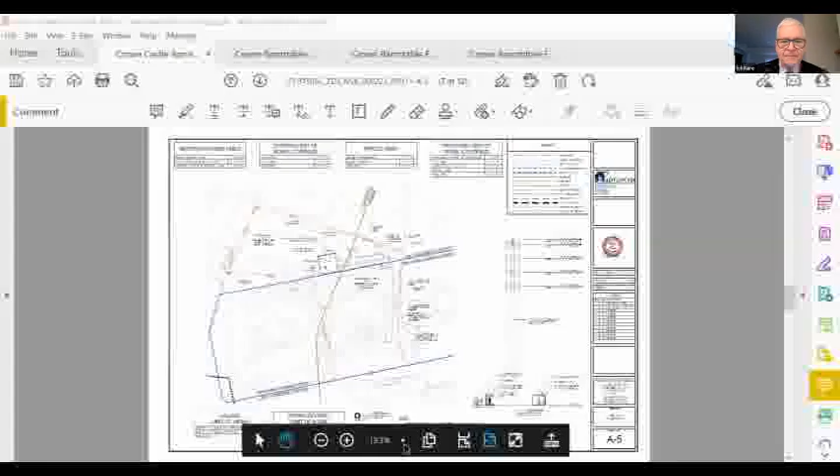So I'll just jump right back. We had appeared here for informal site plan over the last 11 months. We have gone through the process with the Cape Cod Commission, we have received their approval via their written decision, which has since been recorded.

I will quickly go over some of the changes that were made, just to refresh everyone's recollection about the project. So what we're looking to do in this property is sort of cut up in different areas, zoning districts and fire districts. Falmouth Road, obviously here with the commercial development of the site, we'll be using the commercial portion of the property to access the tower area. The actual site is outlined here in red.

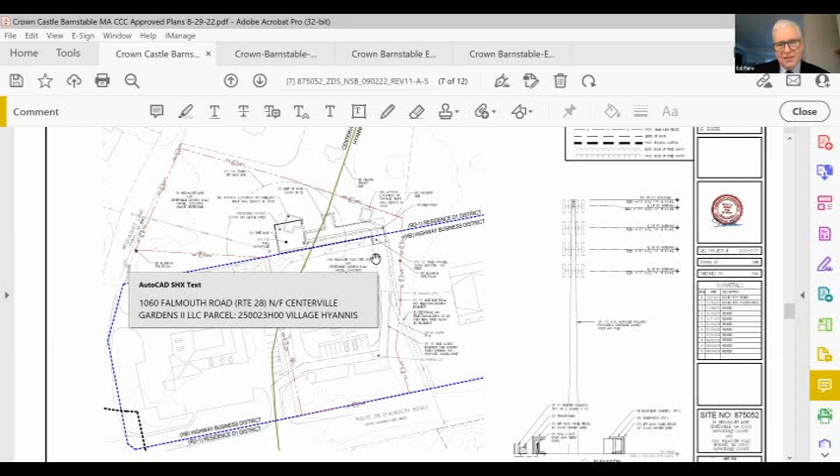As I said, the property is located in 2 zoning districts, the HB Highway Business District towards the front, towards Falmouth, and the RD Residence D1 district toward the rear, where we propose to extend a gravel access drive along the way to the tower.

The black dot here is the proposed location of the tower. None of that has changed. The location of the tower will remain the same in consultation with the Cape Cod Commission. Likewise, the height of the tower will remain the same. We did provide some additional screening and vegetation with a landscape plan, which I'll run through shortly.

One issue that came up at the informal site plan review was what address to use for this particular property. As you'll see from this green line, which runs north and south, the property is located in 2 fire districts, Hyannis to the right, Centerville to the left. So at informal site plan, there was some question about what address would be used.

We did reach out. I understand that Matt Sumner, who I've worked with on other projects in the wireless sphere, has left engineering, so I think this is an issue that we do have to address. I've had some communication early in the week with Mike, and I see that he from engineering is on the call. So I think that's the only issue that remains.

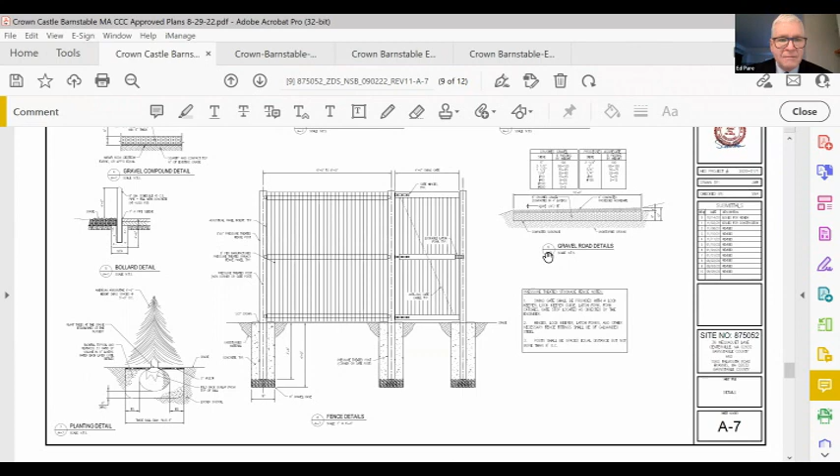I will flip down and hopefully don't make anybody nauseous here.

So a couple of highlights of changes that were made. I think we had always proposed a sound barrier. This is a part of the fence design for the compound. So because the residential properties are located to the north of the site, we have proposed a sound barrier for sound attenuation for the electronic equipment that's in the compound and the backup power generators, which I'll discuss momentarily. Cape Cod Commission did ask us to provide a detailed landscape plan, which you'll see here.

We'd initially proposed just a string or a line of arborvitae. We've gone into much greater detail in outlining what the landscaping plan would look like. We also cut down the size of the parking and turnaround at the request of the Cape Cod Commission.

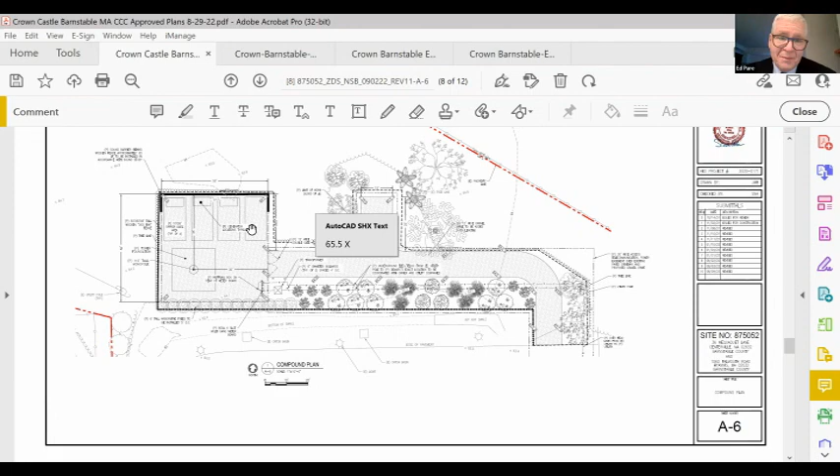Otherwise, the project remains basically the same as Maggie read. It's a 110-foot, 4-carrier pole. We received the approval of the Cape Cod Commission, and I think we have addressed all of the comments from the informal site plan with the exception of working out the address, which is more of a town issue.

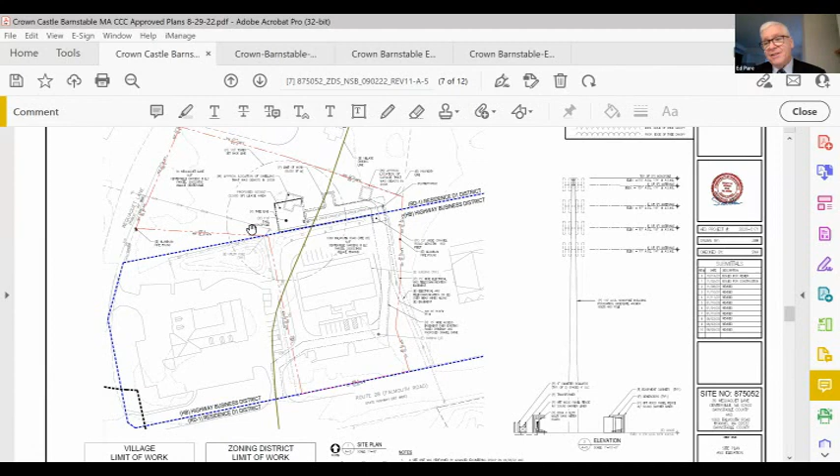We are not proposing to have access over Wequaquet Lane. There's really no way to get to the tower. There was a temporary access drive placed there to do the commercial activity, but that has since become overgrown. So I think from an access standpoint, the address is clearly along Falmouth Road.

And if it's a 911 call or something where there's an emergency, that's something above my pay grade, I think, but that seems like the logical address, depending on what the public safety people and engineering have to say.

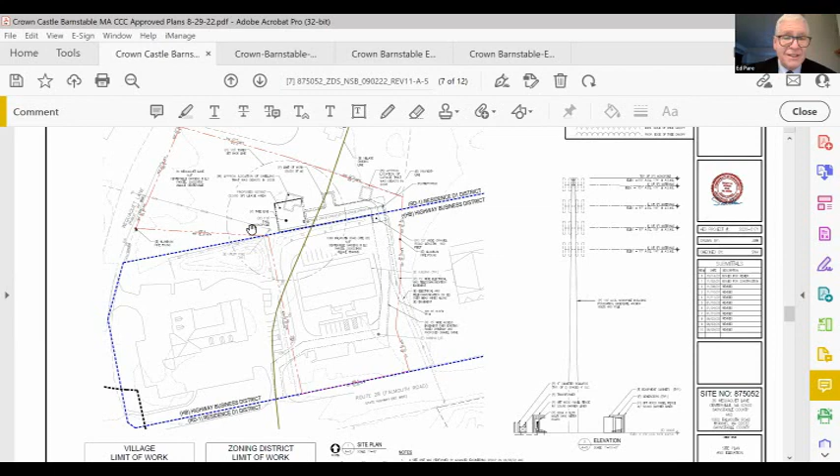With that, like I said, we have Scott Adams, our engineer, on the call, and Paul Beckins from Crown Castle, if there's specific questions. That's sort of the gist of the project. We are scheduled for February 8th before the zoning board.

Excellent. Thank you. If you don't mind dropping your screen real quick. Oh, sorry.

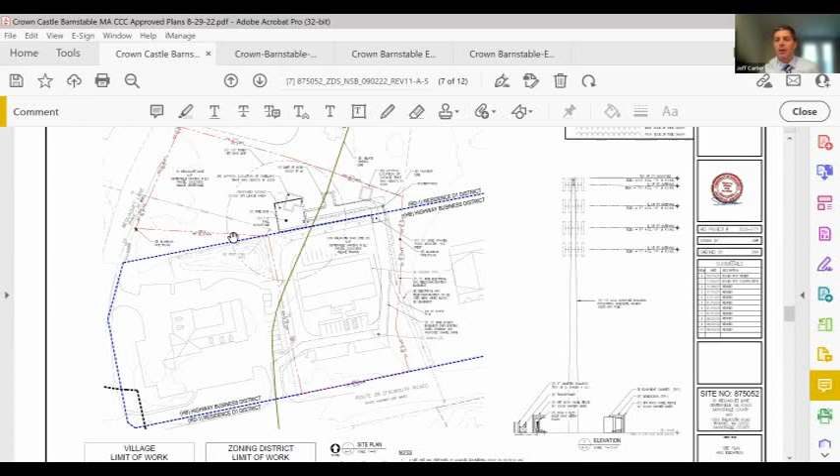Good morning. I almost said afternoon. My comments, Kate Maldonado, Planning and Development, are consistent with what the applicant has already presented, with the fact that they need relief from the Zoning Board of Appeals, both for a variance from height restrictions, as well as to modify their existing 2012 special permit, with specifically conditions 3 and 5, to reference the new plans presented. Condition number 5 talks about prohibiting development and clearing of vegetation within the residential zoned portion of the property, which the applicant is seeking to do. And it sounds like the applicant has already coordinated with Anna Brigham to coordinate a meeting.

Thank you. Thanks, Kate. Dave Stanton, Health. Thank you, Jeff. David Stanton with Health. We have no comments. Excellent.

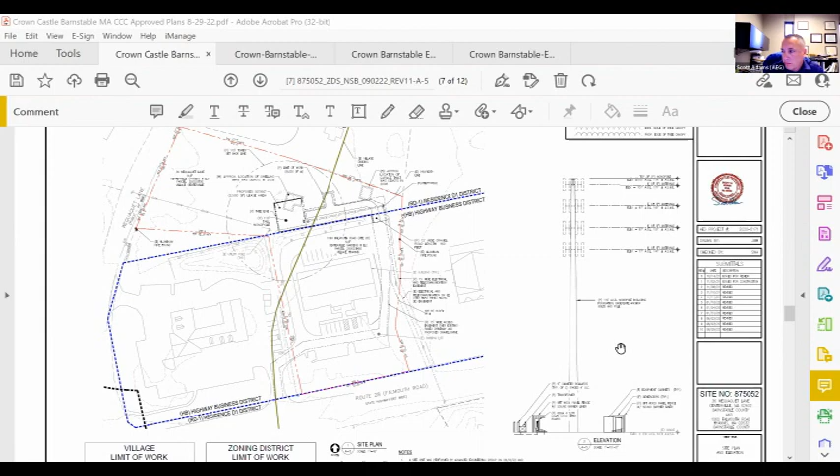Yes sir, so we added that to sheet A6. If you could flip to A6. Sure. Yep, I'm on it. So you can see we added the spot grades based upon his comments that show that any potential increase in flow would be specifically directed to the existing infiltration swale that's on the site now.

So basically the high side is the plan north, if you will, of the parking turnaround, and then everything is just naturally following the existing contours towards that swale. So we're not changing the direction. Everything's going where the water went today. I see.

Well, thank you for identifying that. I was looking for some contour lines to help me, but I didn't see them. The thing is, it's so flat, there's no contours. So we had to add spot grades in just to show that it's really just so flat of a site in that area. I see, it's difficult to show the direction.

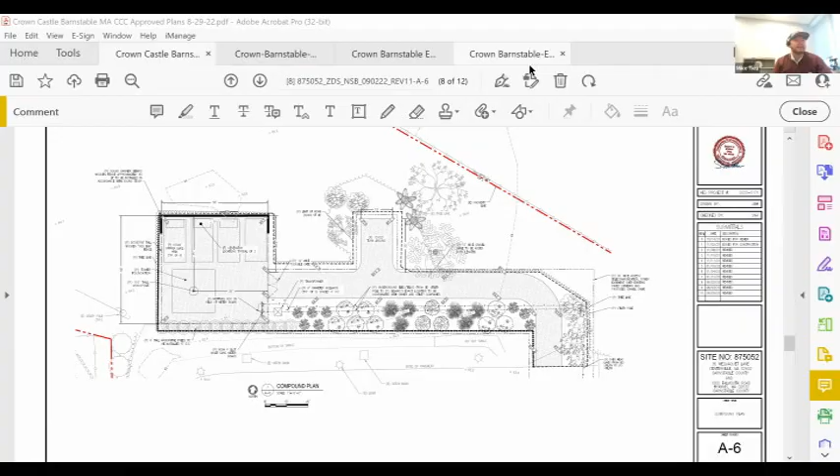I see, thank you, I appreciate giving you that clarification. Mr. Chair, that's what I've got for the group today.

Thanks, Mike. You have a couple engineering guys here. Are you speaking for the whole group today? I am. Okay, thank you.

Okay, that's Maggie. Did we have any other comments from members of the team? We did not.

Okay, so as far as building goes, I'll just speak to that real quick. You're gonna need building permits for each structure on site. The tower itself is gonna need to be a construction control project, so you need to have a registered design professional put those documents together and see the project through.

That's for building, and as far as zoning goes, I think unless anyone has any objections, you guys can proceed to the ZBA to get your special permit, 2012 special permit modified, and try to get relief for the height variance. So that's all the comments that I had today.

Did you want to say something? Yeah, just one quick question on the address. Once we get the utilities identified and put on the plan, should we submit those to Maggie and Mike, or run them by Mike? I just want to know the next steps once we're ready to go so we can work out this address issue.